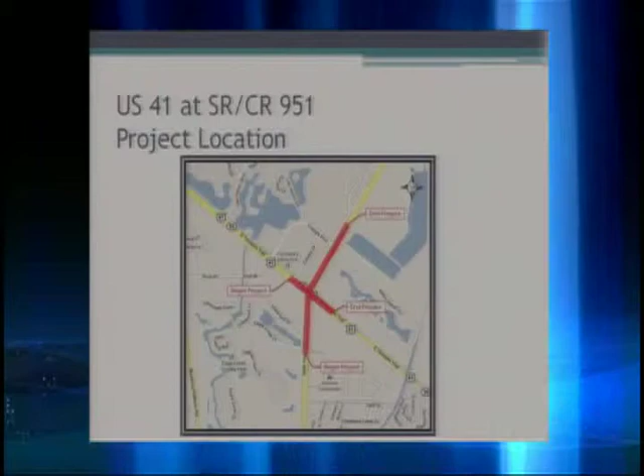The next few slides document the federal and state statutes and regulations followed in this evaluation and public hearing. This public hearing is held in accordance with the Federal Highway Act of 1968 as amended, Title 23 of United States Code 128, Title 40 of the Code of Federal Regulations, Parts 1500 through 1508, Title 23 of the Code of Federal Regulations, Part 771, Florida Statute Section 339.155, Florida Statute Section 339.09, and the National Environmental Policy Act of 1969 as amended. This hearing has been advertised consistent with federal and state requirements and is conducted consistent with the Americans with Disabilities Act of 1990.

This design change reevaluation is developed in accordance with Title VI of the Civil Rights Act of 1964 and related statutes. Anyone who feels that he or she has been discriminated against because of race, color, religion, sex, age, national origin, disability, or family status may complete one of the complaint forms located at the table in the hallway. Please mail it to the address given on the display board.

Project documents are also available for review through October 4th, 2011 at the Collier County South Regional Library, 8065 Lely Cultural Parkway, and at the Collier County Growth Management Division, 2885 South Horseshoe Drive, during regular office hours, and at the project website at www.colliergov.net/US41-951project.

The improvements presented tonight are consistent with the Collier County Metropolitan Planning Organization's 2035 Long-Range Transportation Plan and the Transportation Improvement Program for fiscal year 2011-2012 through fiscal year 2015-2016, adopted May 13, 2011.

The purpose of the US 41 and County Road 951 intersection PD&E reevaluation is to reevaluate the findings of the 2008 PD&E study to select an alternative that improves upon the alternative selected during that study. The reevaluation evaluated alternatives to meet the future traffic needs, provide level of service D or better through the year 2035, improve safety by removing the skew along County Road 951, and improve emergency evacuation in southern Collier County.

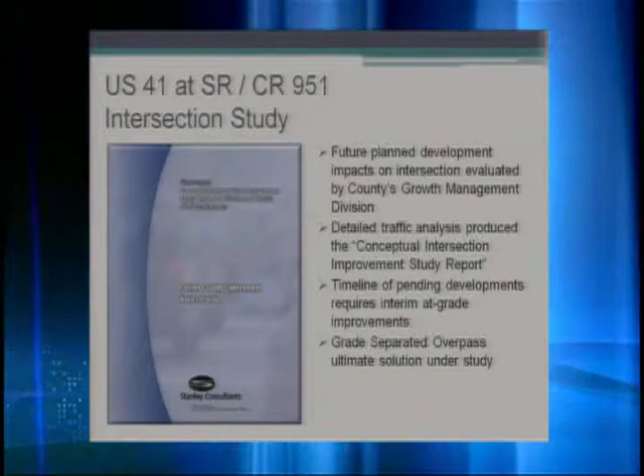Collier County's Growth Management Division embarked on a detailed intersection study which evaluated grade separations on US 41 and County Road 951 and at-grade alternatives. The Conceptual Intersection Improvement Study Report identified a grade-separated overpass constructed in 2 phases as the ultimate solution. Due to pending traffic needs and economic conditions, the first phase is an interim at-grade improvement that would maintain an acceptable level of service through 2025, when the grade-separated overpass would be needed. The grade-separated overpass is expected to provide an acceptable level of service beyond year 2035.

The need for the improvements to the US 41 and County Road 951 intersection has been established based on projected future population and employment growth in Collier County, expected future traffic demands within the study area, the critical role of US 41 and County Road 951 in the Collier County Emergency Management Department's evacuation network, the need to correct the skew in the intersection, and consistency with local government plans, goals, and objectives.

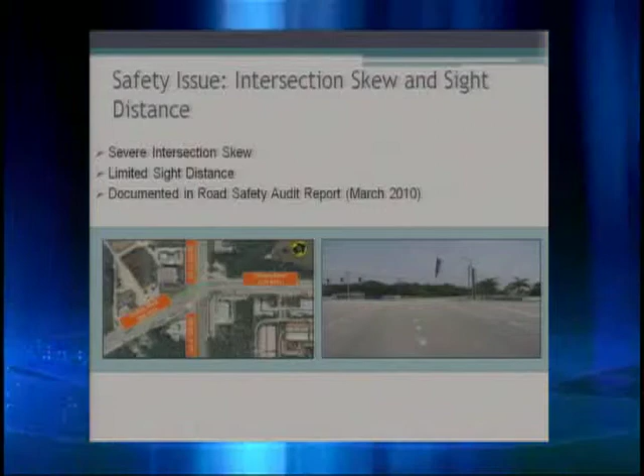The southbound and northbound movements require drivers to proceed with caution through the intersection skew. This approach has a skew that requires vehicles to adjust their travel path significantly. This issue is aggravated by potential sight distance limitations due to a crest in the roadway through the intersection in the southbound direction. The intersection has a history of multiple sideswipe crashes, particularly on this approach. The intersection issues were documented in the Road Safety Audit Report in March of 2010.

Traffic analyses were performed to determine what improvements were necessary to maintain an acceptable level of service at this intersection. Several alternatives were developed. The alternative selected for reevaluation was an ultimate grade-separated overpass, which would be constructed in 2 phases. The interim at-grade improvements would be constructed initially. When the traffic congestion becomes heavy enough, the ultimate grade-separated overpass would be implemented. The preferred alternative is the grade-separated overpass.

With the PD&E approved at-grade alternative, the existing through lanes remain the same, and 3 left turn lanes are provided on all approaches. This is the alternative that was generated through the 2008 PD&E study. There are advantages and disadvantages specific to the PD&E approved at-grade alternative. The advantages include it's the lowest cost improvement and less right-of-way is needed. The disadvantages specific to the PD&E approved at-grade alternative include it does not correct the existing County Road 951 skew through the intersection. The level of service is expected to be at E by year 2025. The level of service is expected to be at F, which is failing, by the year 2031.

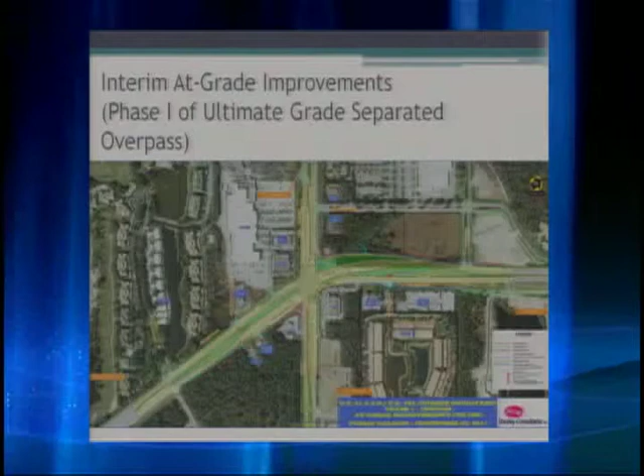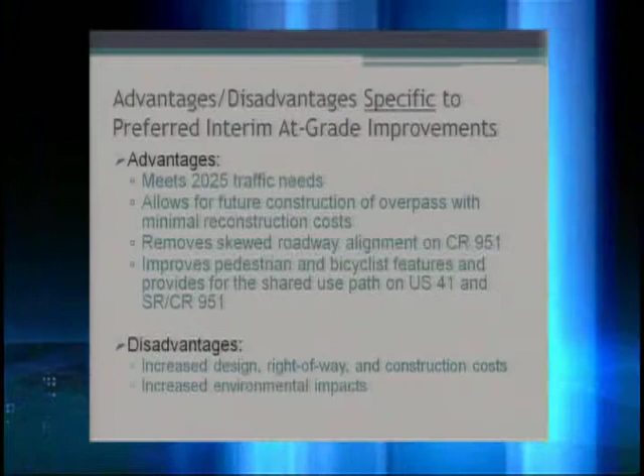Current funding will allow the construction of the interim at-grade improvements. Those improvements would provide the right-of-way footprint for constructing the overpass when funding becomes available. The interim at-grade improvements correct the skewed alignment, enhance the sight distance, and improve safety. Advantages specific to the preferred interim at-grade improvements are that it meets the 2025 traffic needs, allows for future construction of the overpass with minimal reconstruction costs, removes the skewed roadway alignment on County Road 951, and improves pedestrian and bicyclist features and provides for the shared use path on US 41 and County Road 951. The disadvantages specific to the interim at-grade improvements include increased design, right-of-way, and construction costs, and increased environmental impacts.

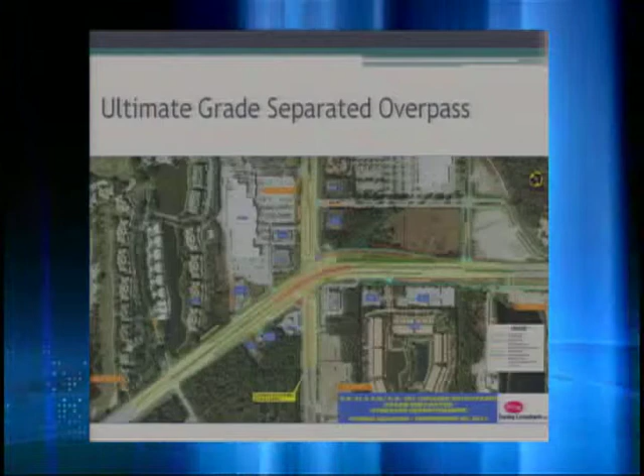The grade-separated overpass is the ultimate intersection improvement which would be constructed once funding becomes available and would be built within the wide median of the interim at-grade intersection. A grade-separated overpass would greatly reduce traffic congestion and create better overall safety and efficiency for the transportation system. It also meets future development capacity requirements. Property access would change with the construction of the overpass, and U-turn lanes would be provided under the bridge.

The bars on this operational comparison chart represent the delay or waiting time that each vehicle would experience at the intersection. Level of Service E is shown as the yellow horizontal bar and is the dividing line between good service below the line and poor service above the line. The blue bar demonstrates that the PD&E approved at-grade intersection reaches level of service E in the year 2025, whereas the purple bar demonstrates that the interim at-grade intersection is expected to operate better through the year 2025. The green bar demonstrates that the grade-separated overpass, or ultimate improvement, is expected to operate better than the interim at-grade with the higher traffic volumes beyond year 2035.

The Florida Department of Transportation has programmed approximately $3.2 million. Private developer contributions are approximately $8.3 million, and Collier County funding is approximately $7.3 million for the project. In April 2009, the Collier County Board of County Commissioners and a group of developers entered into a developer contribution agreement to help fund the design and construction of at-grade improvements. Design and construction funding for at-grade improvements is in Collier County's adopted 5-year work program.

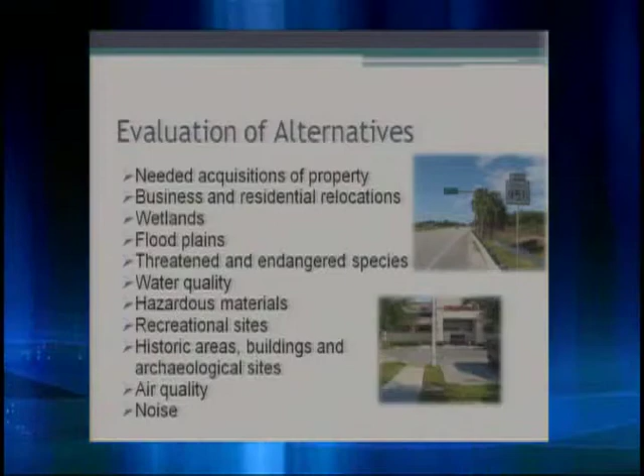A detailed comparative alternative evaluation matrix is shown here and provided in your public hearing handout and on a display board for your review. Construction of at-grade improvements could begin as early as 2012.

Proposed design changes for the FDOT approved at-grade alternative and the preferred interim grade-separated overpass require no business or residential relocations, although the county will need to acquire some additional property or right-of-way. The FDOT approved at-grade alternative requires additional right-of-way at the northwest quadrant of the intersection.

The interim at-grade and ultimate grade-separated overpass requires right-of-way acquisition for the roadway alternative at the northwest, northeast, southwest, and southeast quadrants of the intersection. Right-of-way acquisition for the preferred interim at-grade improvements will accommodate construction of the future grade-separated overpass.

In compliance with Executive Order 11990, Protection of Wetlands, the project team reviewed how wetlands may be involved or relate to proposed improvements. The FDOT-approved at-grade concept does not affect any wetlands. The interim at-grade and ultimate grade-separated overpass improvements will affect approximately 0.96 acres of wetlands.

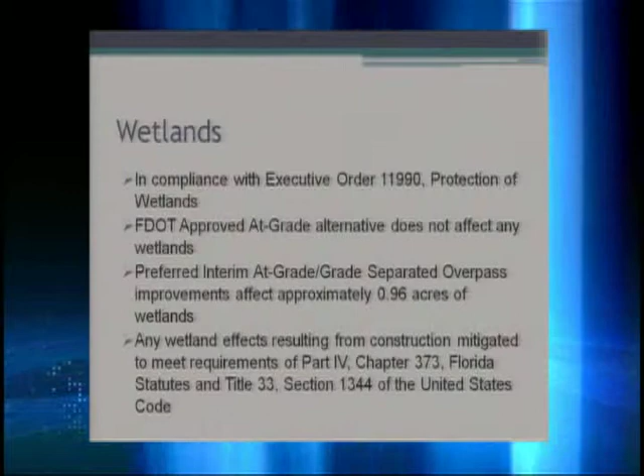The project team also analyzed the study area for potential floodplain involvement in accordance with Executive Order 11988, Floodplain Management. The existing US 41 and the right-of-way expansion and pond sites are located within the Federal Emergency Management Agency 100-year flood zone. Since the flooding source for the project study area is the Gulf of Mexico, the flood zones are based on tidal flooding. Therefore, the required filling as part of the proposed improvements will not have additional impacts on flood heights or limits. There are no floodways impacted by the project.

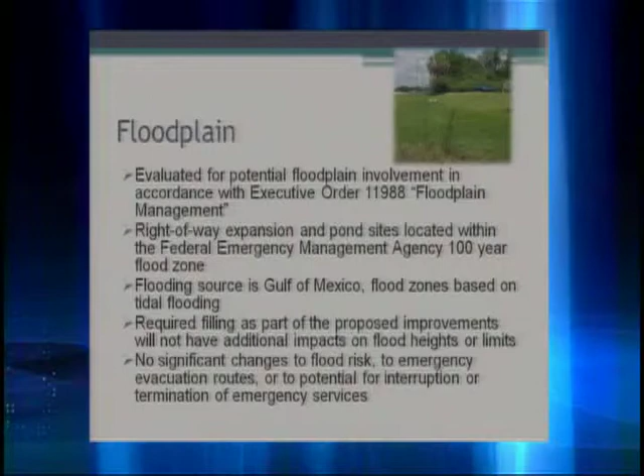Proposed design changes will cause no significant changes to flood risk, to emergency evacuation routes, or to the potential for interruption or termination of emergency services.

The Endangered Species Act of 1973 as amended, and Florida statutes, afford special protection to threatened and endangered species. In its review of protected species and their critical habitat, it was determined that either alternative is not expected to adversely affect any state or federally listed species.

Henderson Creek, which is outside the study area, is an Outstanding Florida Water and aquatic preserve that may be taking both direct and indirect stormwater discharge from the proposed intersection improvements at US 41 and County Road 951. Additional treatment measures for stormwater discharge into this water body may be required by the permitting agencies.

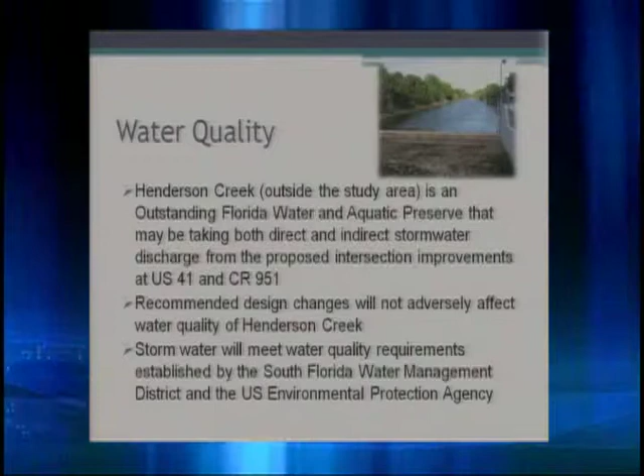As part of the water quality impact evaluation, the team has taken steps to ensure recommended design changes will not adversely affect water quality of Henderson Creek along US 41 or County Road 951. At a minimum, design to accommodate stormwater will meet water quality requirements established by the South Florida Water Management District and the United States Environmental Protection Agency.

There were 3 sites within the project study area that were identified as potentially contaminated in the original PD&E study. For these 3 sites, 1 location was identified as high risk and 2 locations as medium risk for petroleum contamination. An assessment was conducted to determine if contamination from these sites would affect construction activities. The assessment did not identify any contaminants of concern in the soil or groundwater within the US 41 or County Road 951 right-of-way adjacent to the contaminated sites.

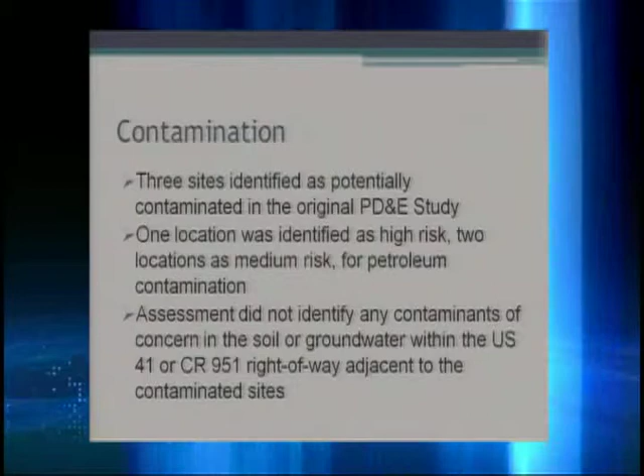This project is located in an area designated as an attainment area for all national ambient air quality standards, which means the air quality in this area is better than the national ambient air quality standards. Therefore, the Clean Air Act conformity requirements do not apply to this project. The preferred interim at-grade and grade-separated overpass would improve air quality by reducing congestion.

Construction activities may cause minor short-term air quality effects, like dust from earthwork and unpaved roads. Construction contractors will follow all local and state regulations and specifications to minimize these effects. Long-term effects are not anticipated.

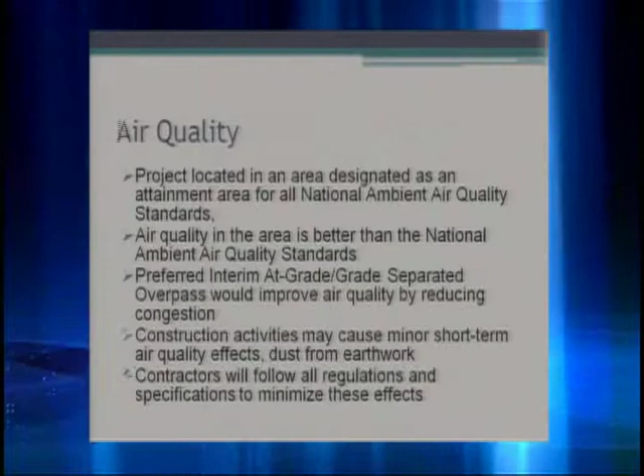In compliance with Title 23 Code of Federal Regulations, Part 772, the project team also has evaluated how potential increases in traffic noise associated with proposed interim and ultimate improvements may affect communities near the intersection.

Specifically, the team studied noise-sensitive sites within the project study area along US 41 and County Road 951 to determine areas that will experience future traffic noise levels that approach, meet, or exceed Federal Highway Administration's noise abatement criteria. During its review, the team considered feasibility and cost reasonableness for abatement measures that would reduce traffic noise at affected

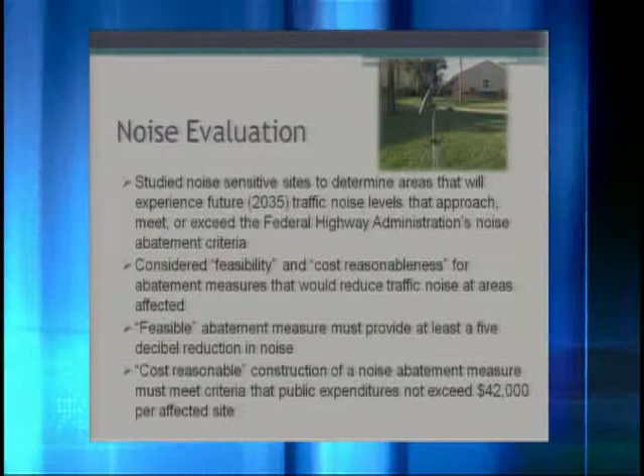areas. To be considered feasible, an abatement measure must provide at least a 5 decibel reduction in noise to the affected site. To be considered cost reasonable, construction of a noise abatement measure must meet criteria that public expenditures not exceed $42,000 per affected site.

For both the Florida Department of Transportation approved at-grade concept and the preferred interim at-grade grade-separated overpass, it was determined that noise impacts above the noise abatement criteria would occur at some areas of the Eagle Creek community. Further coordination with the Eagle Creek community will occur in the design phase.

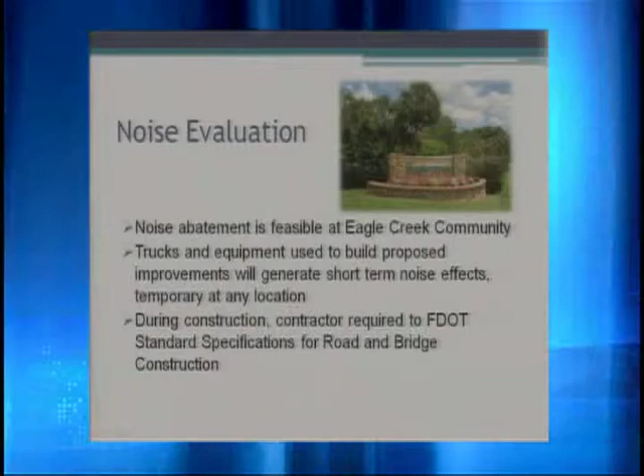Although trucks and equipment used to build proposed improvements to US 41 and County Road 951 intersection will generate short-term noise effects, they will be temporary at any location. During construction, the contractor is required to follow the most recent edition of the Florida Department of Transportation Standard Specifications for Road and Bridge Construction, which addresses noise associated with construction. Noise specialists are here.

A Cultural Resources Assessment Survey for the US 41 County Road 951 Intersection Improvements Project was conducted as part of the PD&E Reevaluation for the project. The Cultural Resource Assessment Survey resulted in the identification of no archaeological resources. The historic resources found within the study area, the Tamiami Trail and the Tamiami Canal, were previously determined to be ineligible for the National Register.

In accordance with Florida Statute 335.199, access changes will occur on both US 41 and State Road County Road 951 if the interim and ultimate concepts are constructed. There are two existing directional median openings that will be closed once the grade-separated overpass is constructed, but would remain open in the interim condition.

The first location is on State Road 951 northbound at the access to Eagle Creek Shopping Center. Access will be provided via a U-turn under the overpass. The second location is on County Road 951 southbound at the access to Falling Waters. Access will be provided via a U-turn under the overpass.

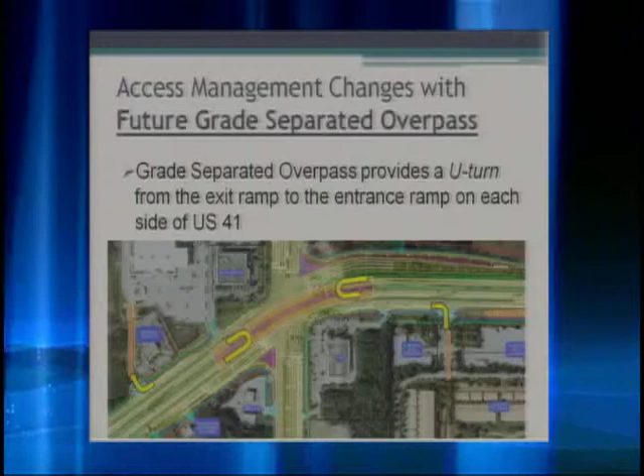To accommodate these access changes, the grade-separated overpass intersection design provides for a U-turn from the exit ramp to the entrance ramp on each side of US 41. The U-turns are necessary since local right-in, right-out access is provided to the properties along the ramps.

The following accesses would be modified when the interim intersection is constructed and would remain in this configuration when the grade-separated overpass is constructed. The 7-Eleven gas station driveway on US 41 would be a right-in only. One of the two Circle K driveways on US 41 just east of County Road 951 would be closed. The driveway along State Road 951 would become right-in only. These changes would remain when the ultimate grade-separated overpass is constructed.

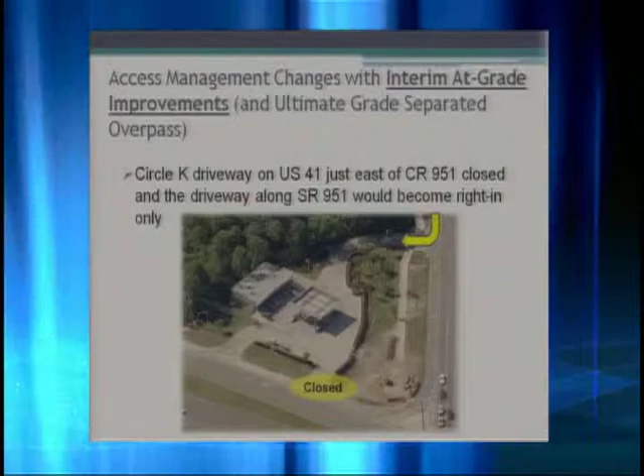The CVS driveway on US 41 would be a right-in only and would remain in this configuration when the ultimate grade-separated overpass is constructed. The driveway on County Road 951 would remain a right-in and right-out for access to CVS.

There are many benefits of implementing the interim at-grade and ultimate grade-separated alternative. The skew along County Road 951 is removed. The evacuation network is improved in support of the Collier County Emergency Management Department evacuation network. The ultimate required right-of-way is obtained before development occurs, preventing costly expenditures or relocations. Reduced congestion will improve air quality. These improvements are consistent with local government plans, goals, and objectives.

We invite you to take a look at display boards in the room tonight that summarize potential social, cultural, and environmental effects of the proposed improvements. We also have displays here providing estimated project costs and a tentative schedule for design, right-of-way, and construction phases for proposed interim and ultimate improvements to the US 41 and County Road 951 intersection. The US 41 and County Road 951 Design Change Reevaluation is scheduled for completion this fall.

In just a few minutes after a short break, you may step up to the microphone and make your comments, which become part of the official public hearing transcript. You also may complete a comment form and drop it in the box provided here tonight, or take the form with you and mail your comments to the county using the address provided on the comment form. If you prefer, you may submit your comments by email instead to the address shown at the bottom of the comment form, or submit a comment via the website. All comments received or postmarked by October 4th become part of the official public hearing transcript.